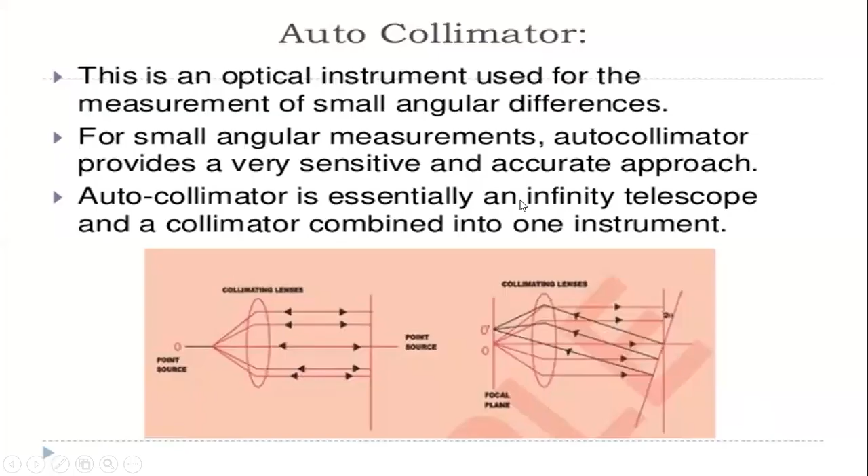So today we are going to see the alignment test on the lathe machine. The first step is to check the level of installation, in both the longitudinal direction as well as the transverse direction. The measuring instrument used for this level of installation is a spirit level, with gauge blocks or straight edges or parallel gauge blocks to suit the guideways of the lathe bed.

The procedure is to first fit the gauge block with the spirit level, which is placed on the bedways at the front position as well as the back position in the crosswise direction. The position of the bubble in the spirit level is to be checked here. First we have to check the leveling of the reading by checking the position of the bubble, and then the readings are to be taken.

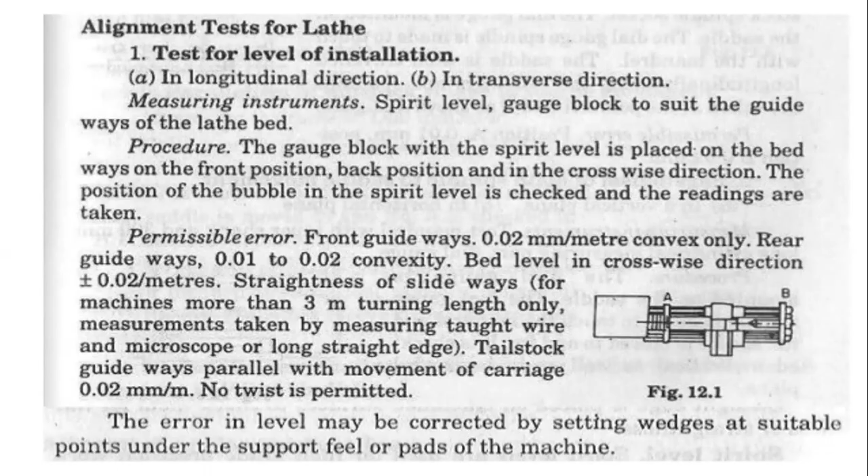The error in the level may be corrected by setting wedges at suitable points under the support feet or pads of the machine. First, you keep the spirit level to be measured, and then the gauge blocks are set for the position of the level in the spirit level. That should be checked for the alignment test.

Next one is the straightness of the saddle in a horizontal plane. Horizontal position means, this is the horizontal position for the lathe machine, with the headstock, the tailstock, and the carriage.

Here we are going to use the measuring instruments. For any alignment test on lathe machine, drilling machine, or milling machine, we have the same type of procedure. First we take the measuring instruments used in the machine, next the procedure for that, and third the permissible error.

The measuring instruments used in this test are the cylindrical test mandrel, which has a length of 600 mm, and next the dial indicator.

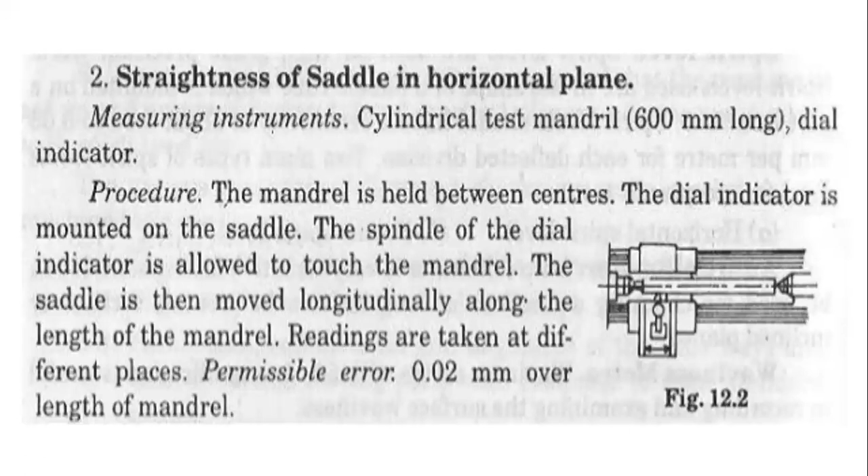So that is for checking the straightness of the saddle. Next one is the alignment of both the centers in the vertical plane. In this position you have to check the alignment of centers.

So in these, the measurements to be taken, the measuring instrument is, first one is the cylindrical mandrel of 600 mm length. So a cylindrical mandrel has to be taken which is of 600 mm length.

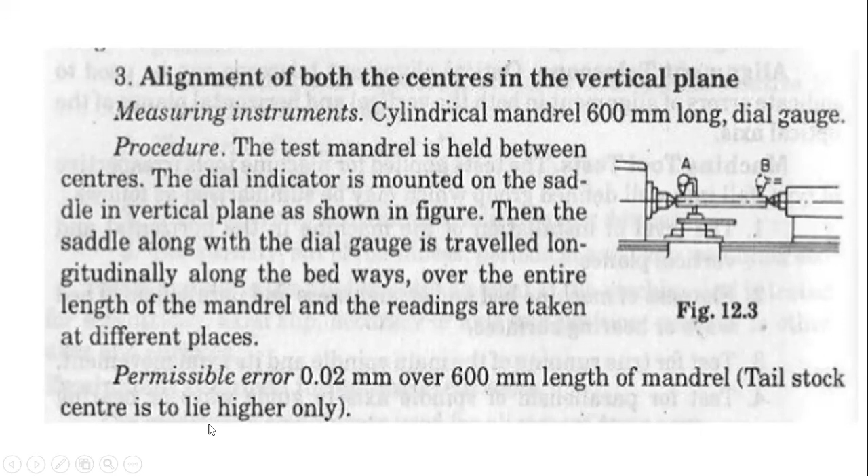So the permissible error is 0.02 mm, in which the tailstock center is to lie higher only, that is on the higher position only. Next one is the true running of the taper socket in the main spindle. So it is to be taken in the main spindle.

So the instruments to be used, that is required, are test mandrel with the taper shank and 300 mm long cylindrical measuring part.

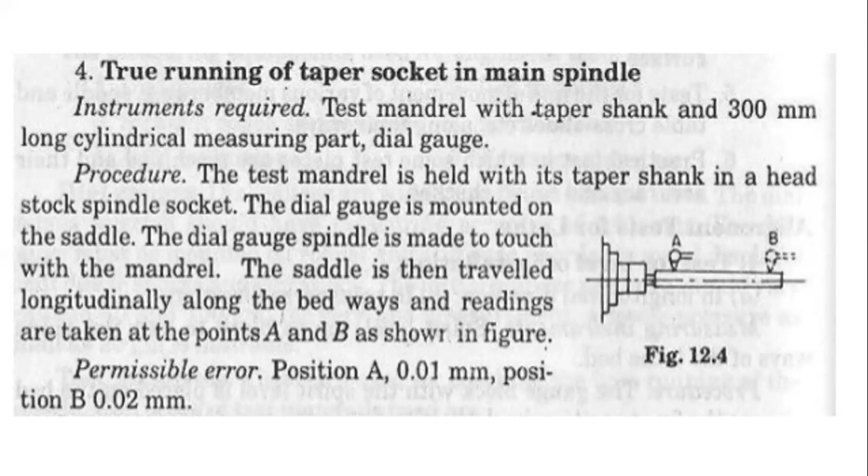Next one is the parallelism of the main spindle to the saddle movement. So it is tested for the saddle movement of the spindle in the vertical plane as well as the horizontal plane.

So for the main spindle to the saddle movement, both the vertical plane and the horizontal plane are to be tested, and the measuring instruments are the test mandrel with the taper shank and 300 mm long cylindrical measuring part, and the dial gauge.

Then we have to go to the procedure. The dial gauge is mounted on the saddle, and then the dial gauge spindle is made to touch the mandrel. Then the saddle is used to move to and fro, that is forward and backward.

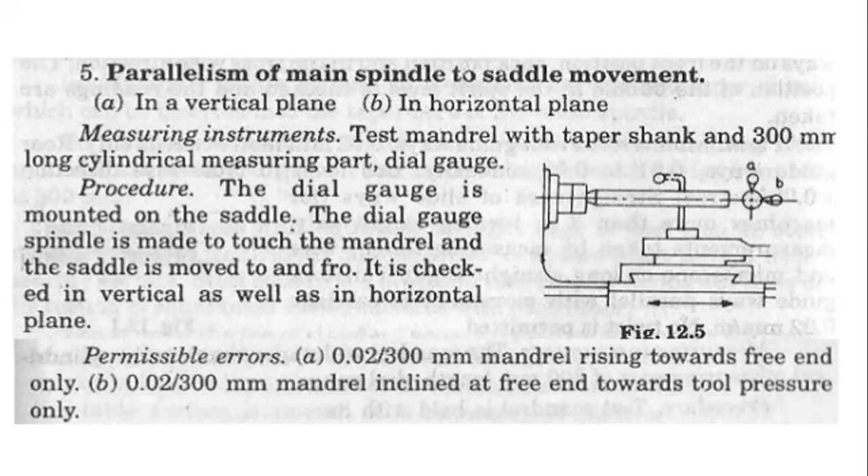Next one is the movement of the upper slide parallel with the main spindle in the vertical plane. So this is the movement of the upper slide motion. The measuring instruments for this are, first, the test mandrel with the taper shank of 300 mm long.

So we have to take the dial gauge also there. Then we have to go for the procedure. The test mandrel is fitted into the spindle, and the dial gauge is clamped to the upper slide.

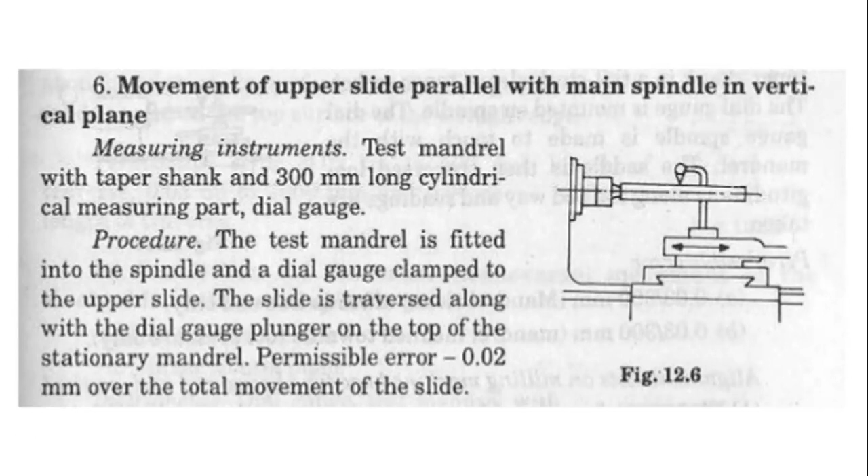Then we have to take the measuring instrument for true running of the locating cylinder of the main spindle. The measuring instrument to be taken is only the dial gauge.

The dial gauge is to be taken for checking, and the procedure is: the dial gauge is mounted on the bed, touching at a point on the main spindle. Then the main spindle is rotated by hand, and readings of the dial gauge are taken.

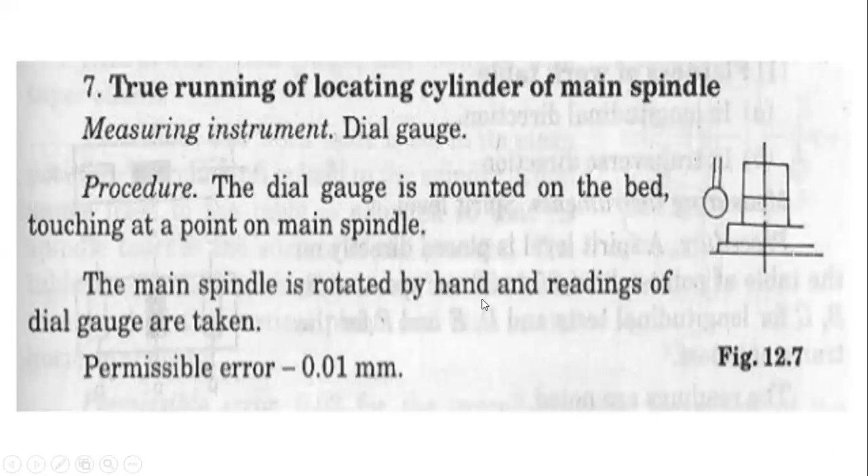Generally the permissible error is 0.01 mm for the true running of the locating cylinder.

Next one is the true running of the head stock center. Here the measuring instrument is the dial gauge.

The live center is held in the tailstock spindle and it is rotated. This is the tailstock center, and the dial gauge is fixed over it, and it has to be rotated, and its trueness is checked by means of a dial gauge. The permissible error occurred in this is 0.01 mm.

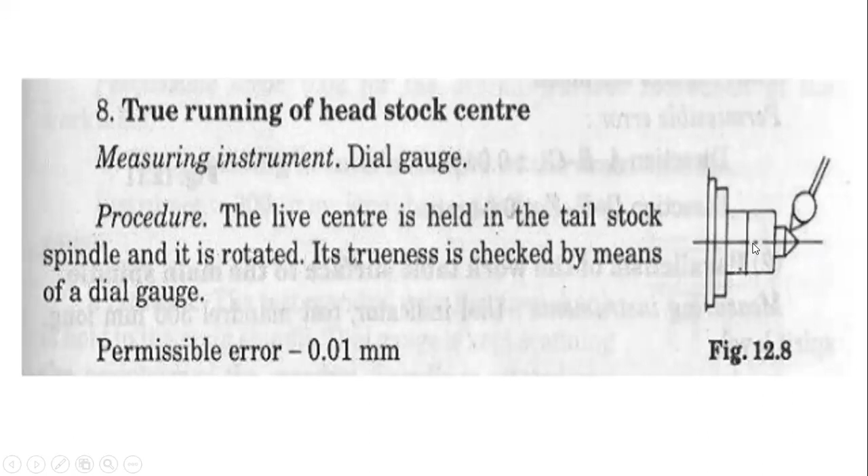Then it is the parallelism of the tailstock sleeve to the saddle movement. We use it to check the tailstock sleeve relative to the saddle movement, and the measuring instrument in it is the dial indicator.

The dial gauge is mounted on the saddle, pointed on it, and the spindle is touched to the sleeve at one end. The saddle is moved to and fro, in the forward and backward direction, and it is checked in the horizontal plane as well as the vertical plane.

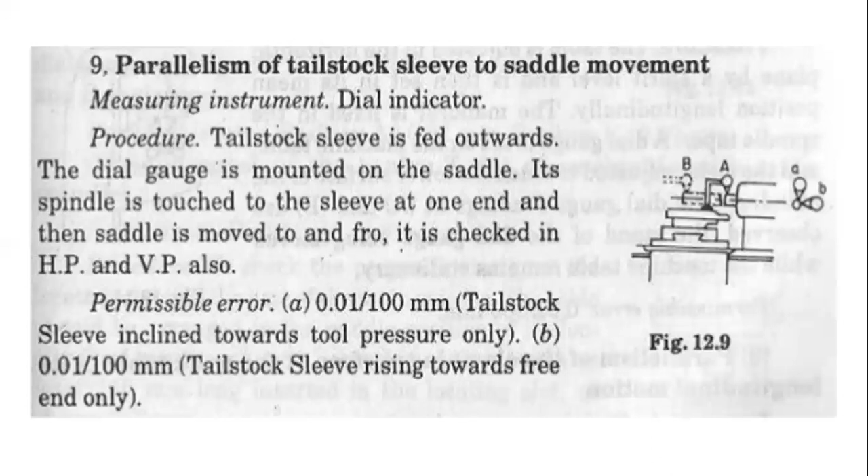Here the measuring instruments to be taken are the mandrel with the taper shank and a cylindrical measuring part of 300 mm length. The test mandrel is of 300 mm length, and a dial gauge is used.

Then the dial gauge has to be mounted on this spindle, and the dial gauge is made to touch with the mandrel. You have to test like this, and it is used to move in the longitudinal direction.